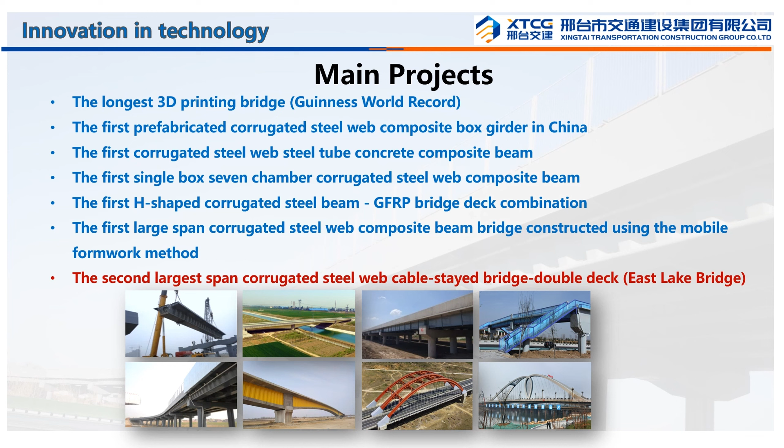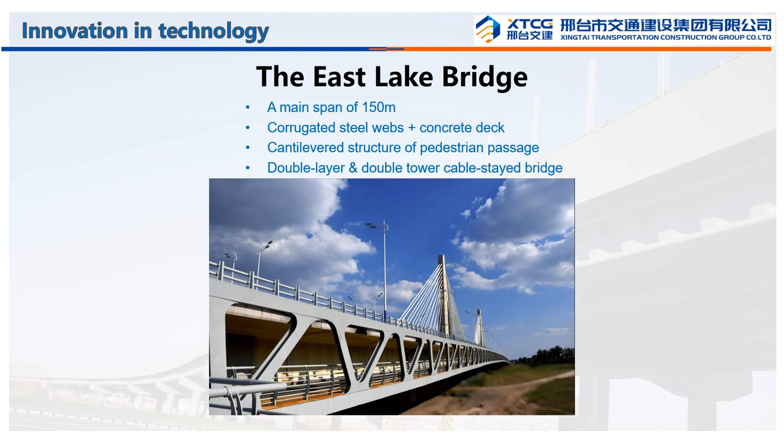The East Lake Bridge is located in Handan City, Hebei Province, China. It is a composite bridge with a main span of 150 meters, consisting of corrugated steel webs and concrete deck. It is a double-layer, double-tower cable-stayed bridge. The main parameters of the bridge are shown in the table. The main section is a corrugated steel web composite section with a single box and 5 cells, and the pedestrian passage is cantilevered using steel plate beams, supplemented by truss beams for decoration.

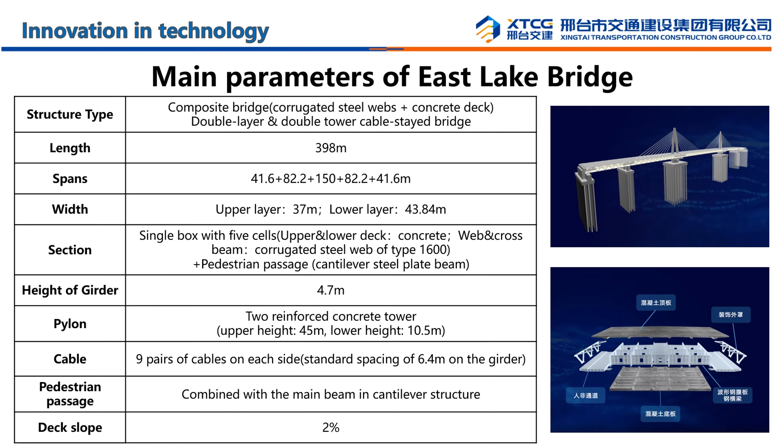This is an introduction video of the construction process of East Lake Bridge. The whole project has a total length of 6.45 kilometers. The East Lake Bridge is a controlling part of this project.

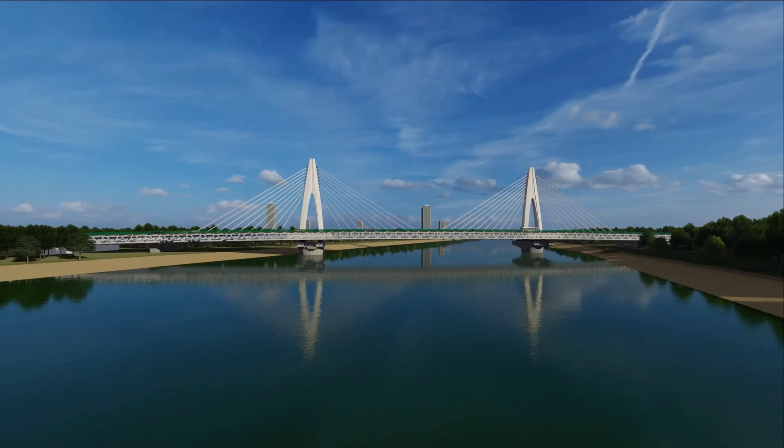The foundation is drilled using the rotary drilling pile technology.

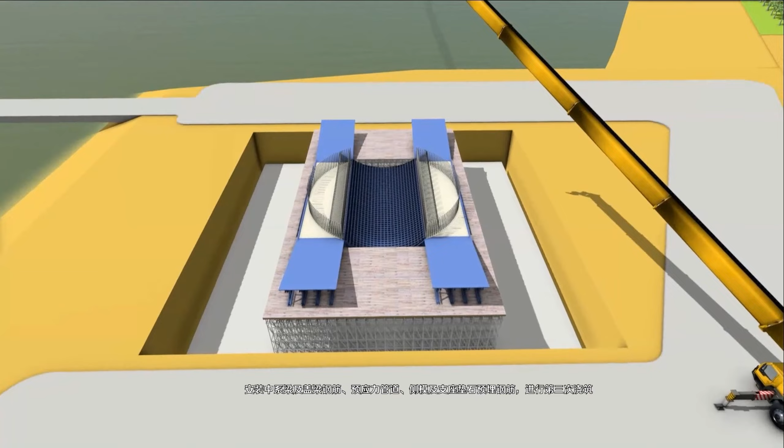The lower pylon is poured in 4 stages, and the upper pylon is poured in 9 segments.

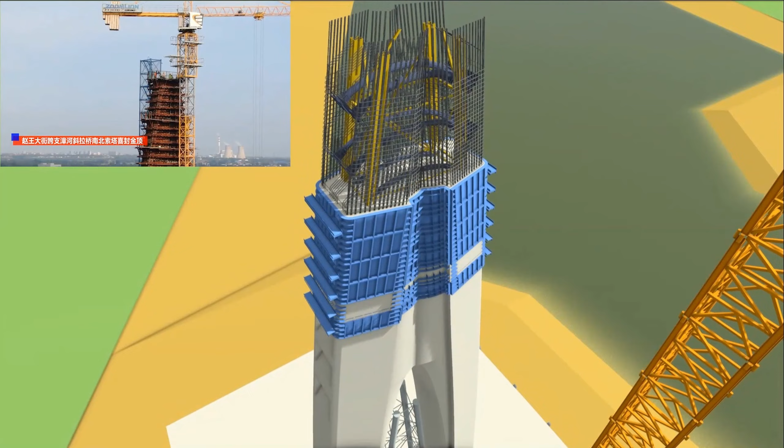The main girder is casted using a moving hanging basket cantilever method.

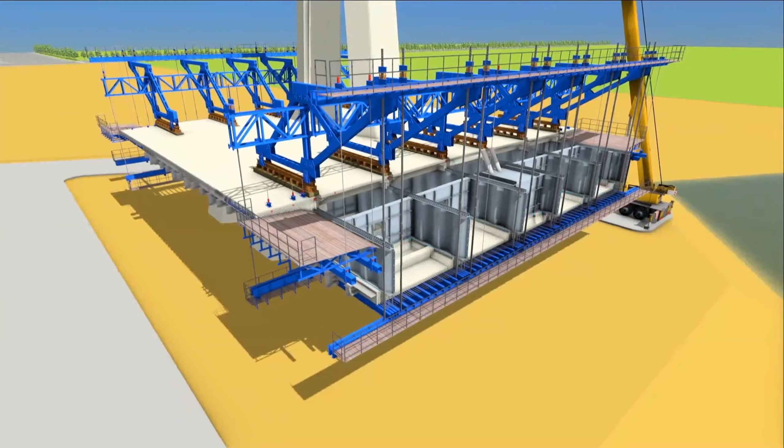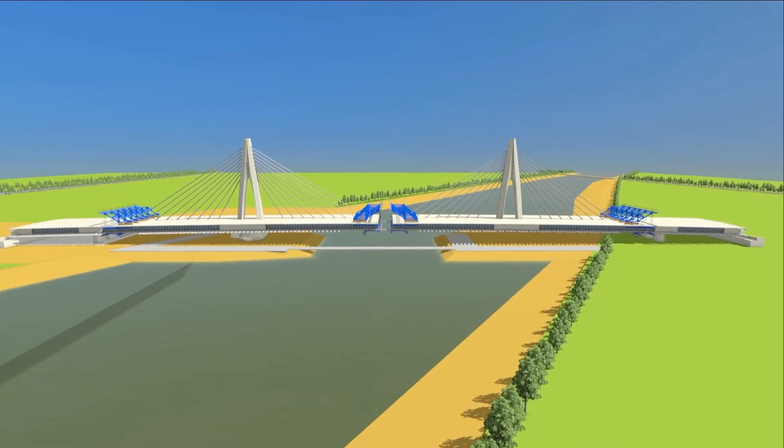After the bridge is closed, pedestrian passage components are installed. Finally, pour the bridge pavement and install ancillary facilities.

The application of BIM technology should not be limited to the level of three-dimensional geometric shapes. The higher the precision of the model, the more effective its application will be.

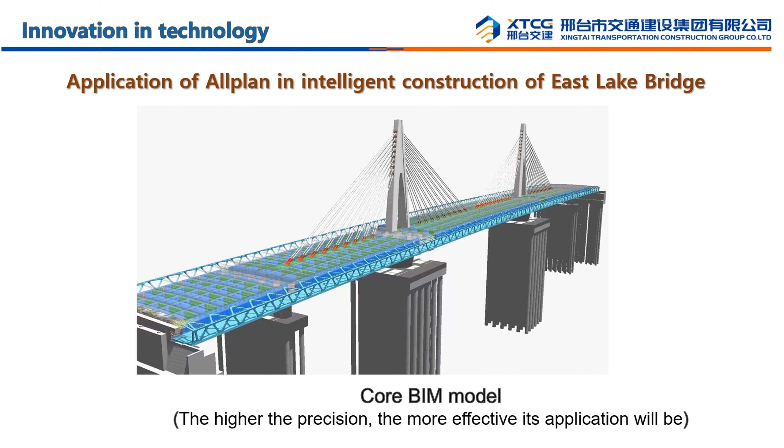In 2021, China issued the Unified Standard for the Application of Highway Engineering Information Models. The accuracy requirements and application fields of BIM models have been proposed for various stages, such as preliminary design, construction drawing design, construction process, and final acceptance. We established the BIM model with L4.0 accuracy using Allplan, and applied it to each stage marked in blue in the figure.

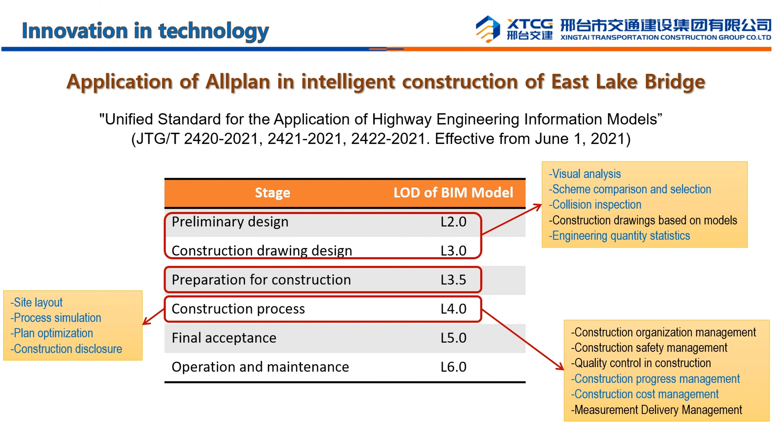The specific application details are shown in the figure. Next, specific introduction will be provided on the important applications.

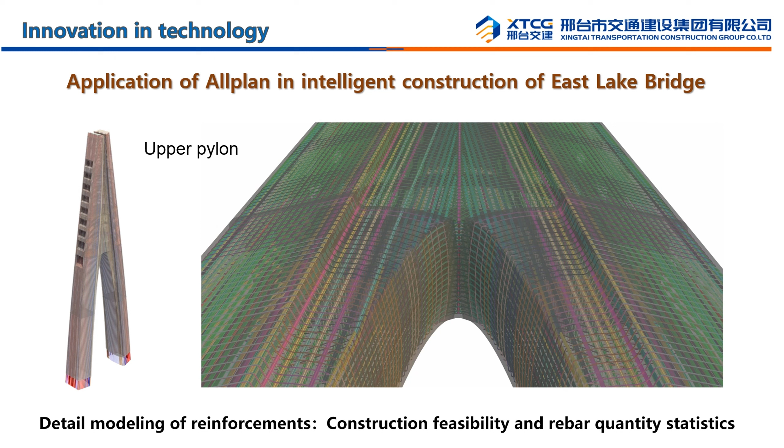We used Allplan to establish a detailed reinforcement model for the upper pylon, evaluated the construction feasibility, and calculated the amount of rebars used. The works for lower pylon are also performed.

This is the detail modeling of reinforcement for upper and lower decks of composite girder. By the way, Allplan Bridge's parameterized modeling function based on route and cross-section allows us to quickly locate the cross-sectional position and contour of the entire model, as well as the position of bridge piers, and update them quickly according to route changes.

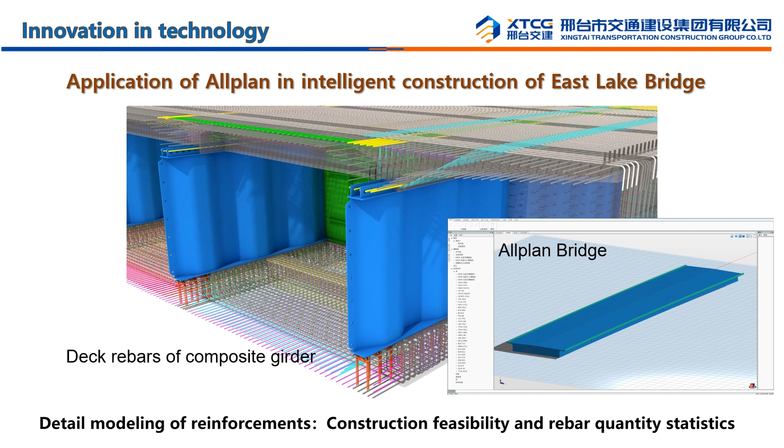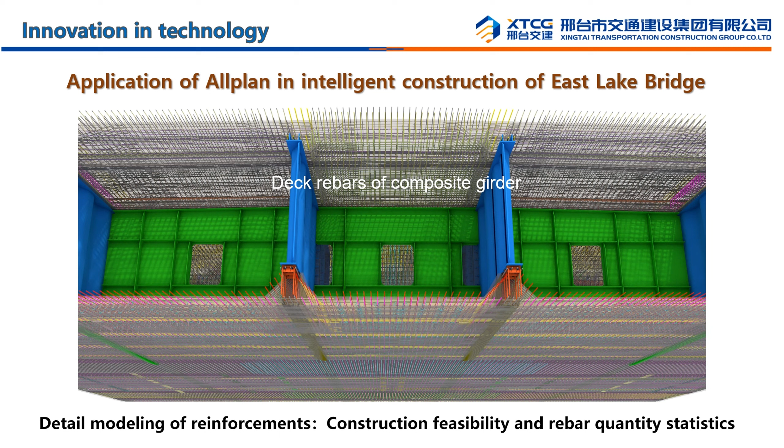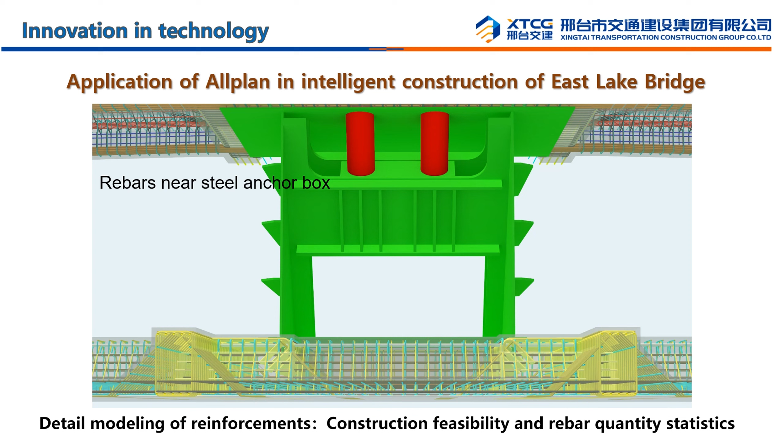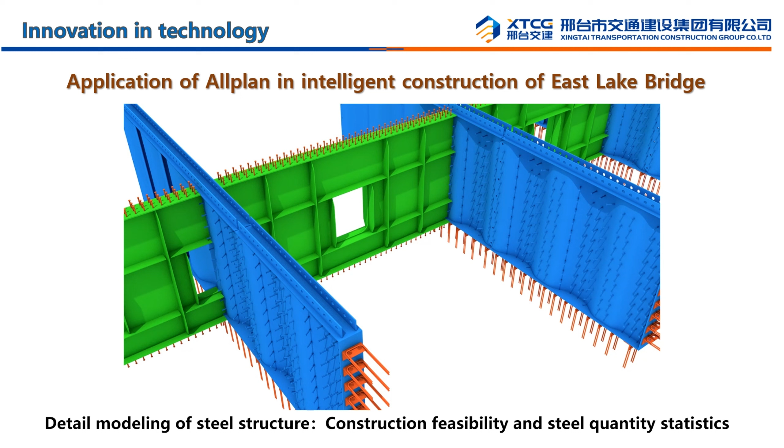Detailed consideration has also been given to the connection between the bridge deck reinforcement and the steel web. Also, the reinforcements near steel anchor box are taken into account. The shear nails for bridge deck and the connection keys at the edge of the web were also simulated. This is another perspective.

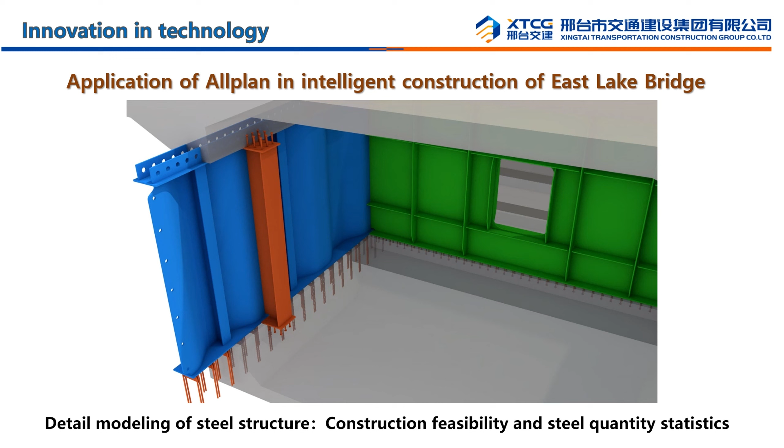For steel structures, the layout of reinforcement and pre-stressed tendons holes are considered as well. This is another perspective.

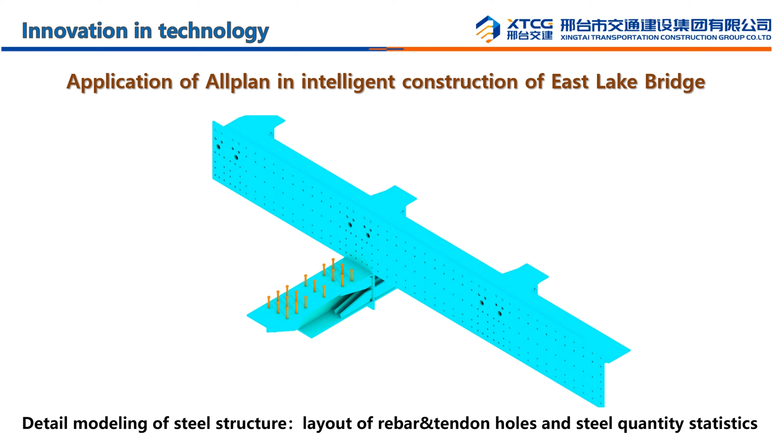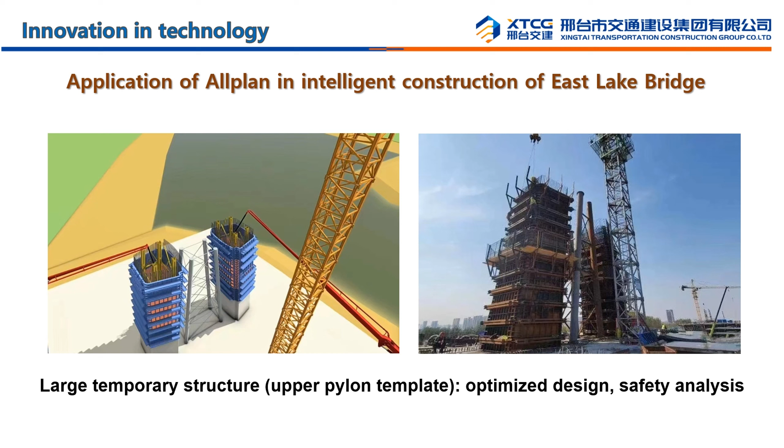Optimized design and safety analysis of large temporary structure are performed for upper pylon template. For the lower pylon, we have corrected many details that were not considered in the design process through precise simulation, providing assurance for the smooth progress of construction.

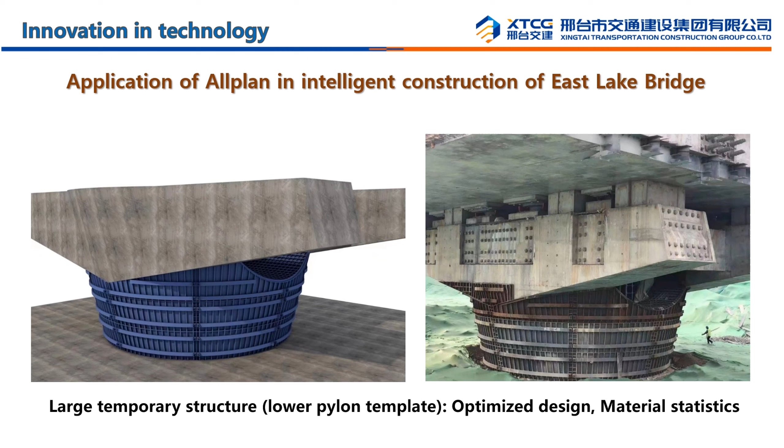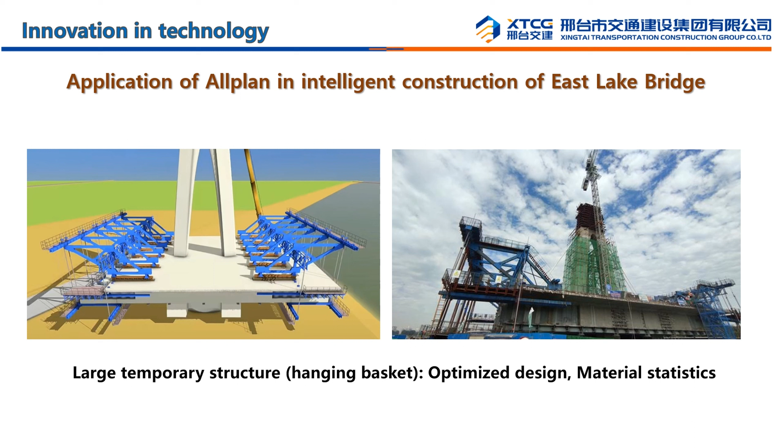The hanging baskets are modeled and construction simulations are performed. Details of hanging baskets. The disc-type scaffoldings are also modeled.

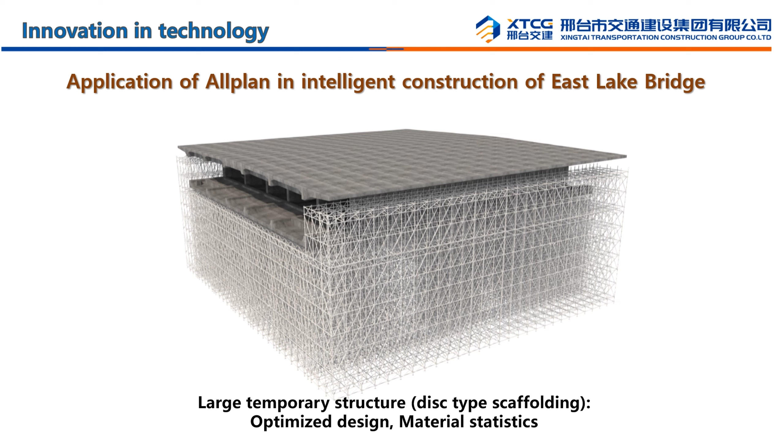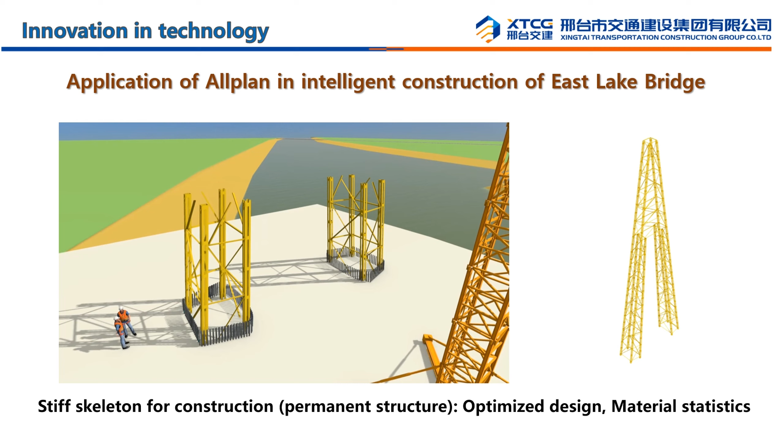Optimized design and material statistics for stiff skeleton for pylon construction are performed. For some repetitive components and components that vary according to certain rules, such as corrugated steel webs, steel structures for pedestrian walkways, truss decorative structures, connection components between the main tower and steel cables, steel templates, etc., we have improved the efficiency and accuracy of modeling through secondary development based on Allplan.

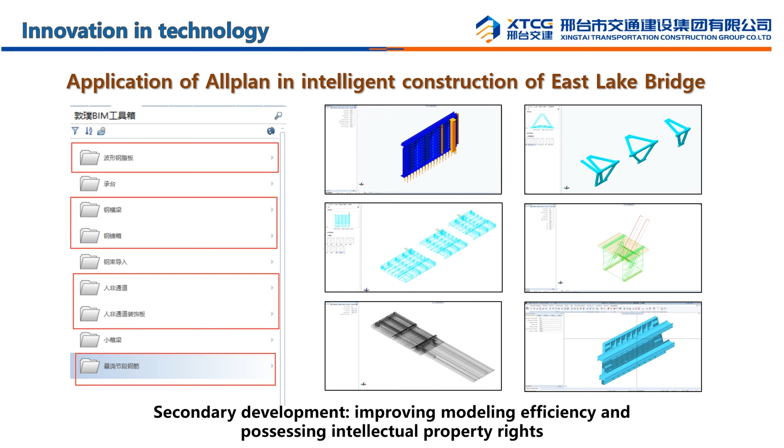This is an introduction video of the modeling tool developed to improve modeling efficiency. The corrugated steel web can be inserted into the corresponding positions of the bridge according to different parameters such as length and height.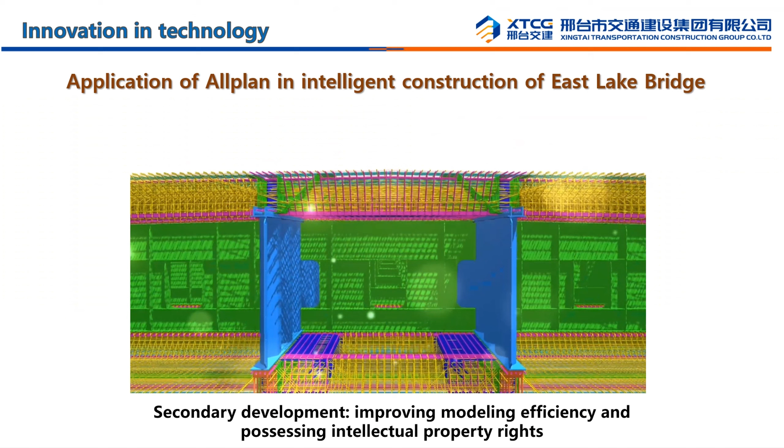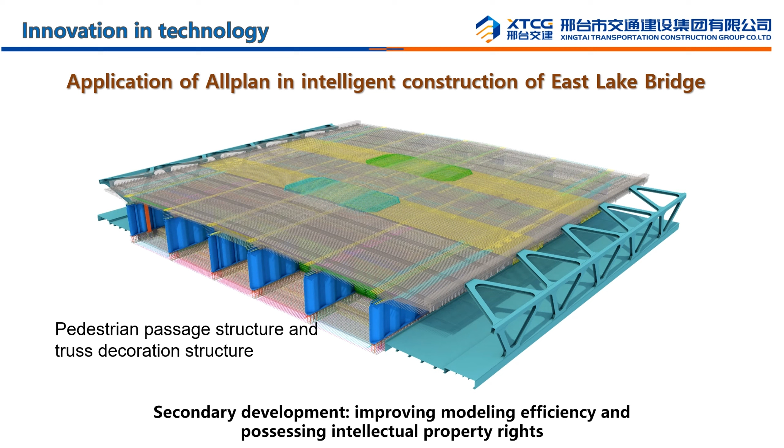This is the view of pedestrian passage structure and truss decoration structure. Large-scale bridge models and souvenir models were able to be 3D printed using Allplan's model data.

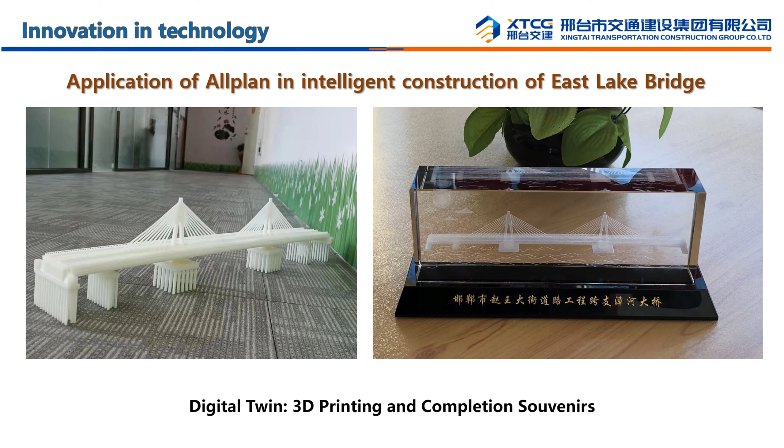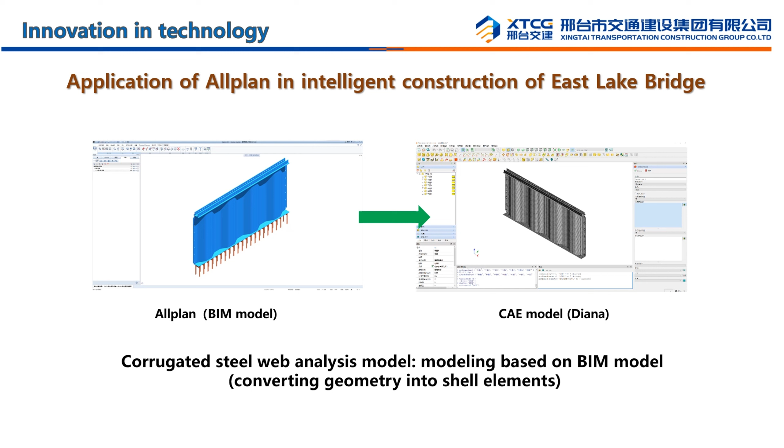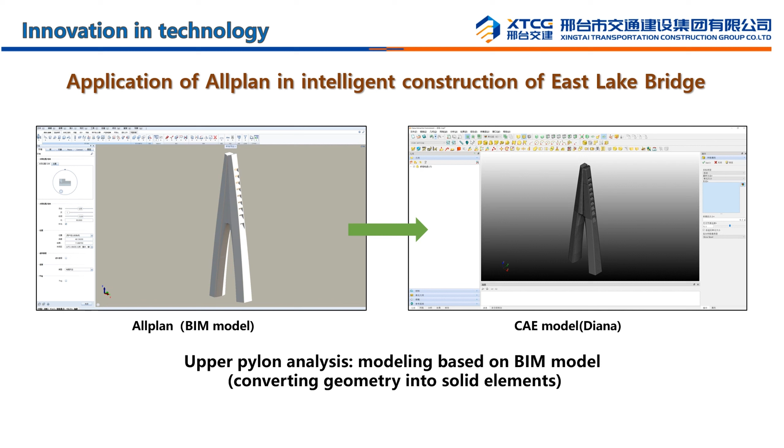We also converted Allplan BIM model to CAE model successfully to do finite element analysis for some purposes. Allplan model could be converted into not only truss, beam elements, but also shell and solid elements. The reinforcements could also be converted as embedded rebar elements, so that crack analysis for complex stress structures or hydration heat analysis for mass concrete could be performed effectively.

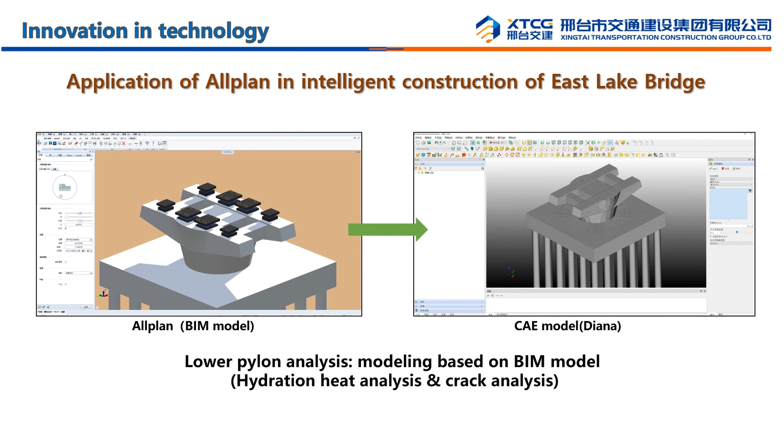In summary, we have achieved many successful applications in intelligent construction for East Lake Bridge. The key reason we could do those is Allplan's powerful and efficient modeling functions, convenient secondary development capabilities, and open data compatibilities. We would like to express our gratitude to the Allplan team.

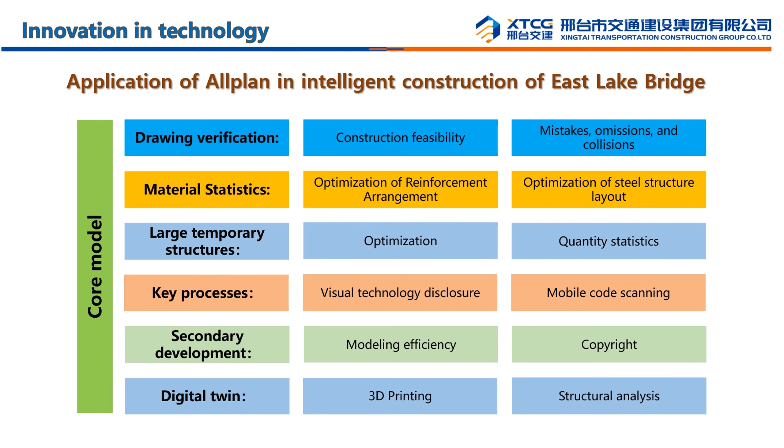As a part of intelligent construction, we are also combining Allplan for intelligent processing of reinforcements. Quick parametric modeling including geometry and reinforcement, segmentation of bridge components such as box girders for easy assembly construction, and automatic optimization of the cutting of reinforcements based on fixed length and overlap specifications.

The reinforcement processing data are automatically transferred to the MES system. Afterwards, the data will be automatically imported into CNC equipment for processing. Finally, assemble into components for prefabrication or on-site installation.